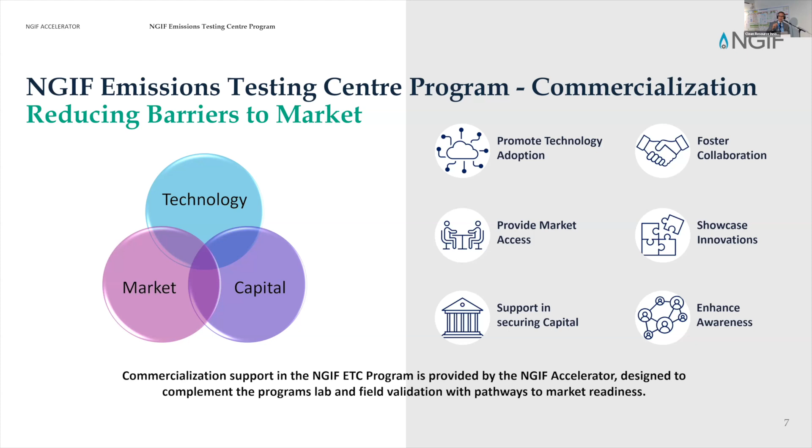We wanted to create this largely because we wanted to drive commercialization forward. Ultimately, what we want is for these innovative technologies, and the companies producing them, to be successful in the market. So our focus is on ensuring that they have everything they need in order to be commercially successful.

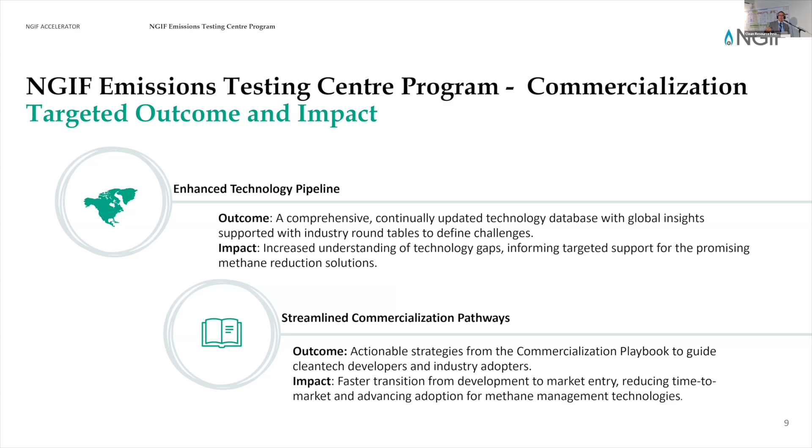There are four dimensions to this. An enhanced technology pipeline—the idea being that we are creating a full ecosystem pipeline of new technology ideas. And streamlined commercialization pathways—how do we help entrepreneurs actually move their projects and companies forward more quickly?

Accelerated market adoption and scale up—by doing the testing on site with a producer, we're allowing the technology to be tested in the field in a way they wouldn't otherwise have access to. And an expanded industry and financial network—we're creating a database and we're engaged with the financial industry.

As I noted a couple of times, we're effectively creating an ecosystem of new technology ideas that can move into the market more quickly, driving forward innovation, thereby driving down methane emissions and continuing to have a successful natural gas industry that's delivering fundamentally what's most important: affordable, reliable, and acceptable energy for Canadians and our customers around the world. With that, I'm going to turn it over to one of our key partners, Ian Gates from the University of Calgary, to talk more about what's actually happening on the ground.

Thank you, Tim. My name is Ian Gates. I'm a professor at the University of Calgary in the Department of Chemical and Petroleum Engineering, also Associate Vice President, Research and Innovation. Today I'll talk about the ETC, the Emissions Testing Centre Lab, and what we're doing there with respect to accelerating technologies and de-risking technologies. Let's go to the next slide.

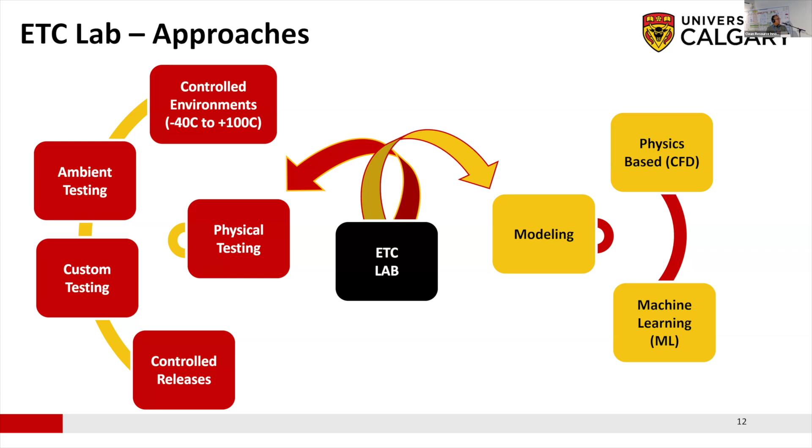The other useful thing about these types of models is the ability to start placing sensors—to put in the minimum number of sensors needed to get a bracketed amount of uncertainty becomes a useful outcome of these types of modeling.

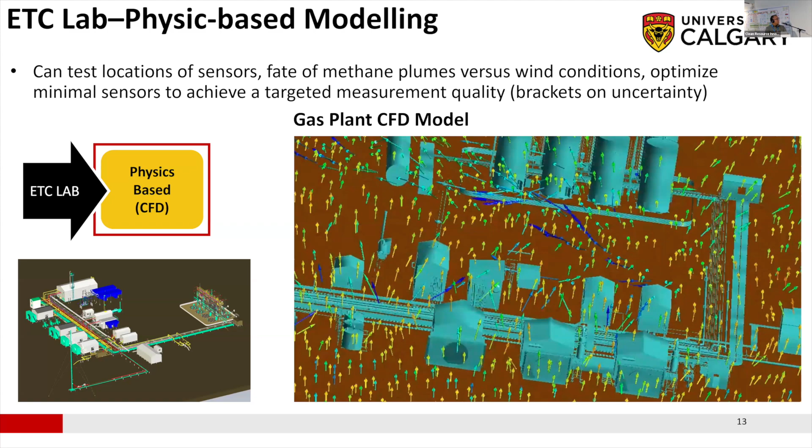So here's a case study on a modeling project that we've done, which is on the flare stack. When you start looking at methane purge rates in flare stacks, of course, we want to minimize that. And the problem is you have air that can go inside the flare stack. So it's really about minimizing, or really avoiding, any oxygen going inside the flare stack.

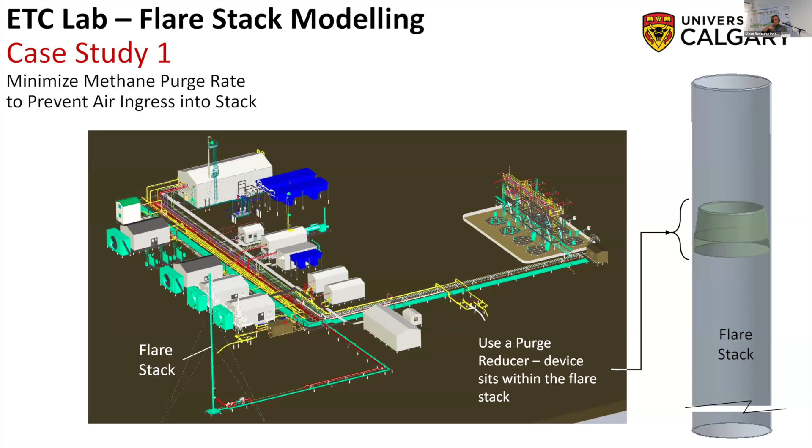So what you see there is the plant, and then on the side the flare stack, and what's inside there is a purge reducer, which you would place inside the flare stack to reduce the purge rate of natural gas, so as to minimize the ingress of oxygen into that flare stack. Let's go to the next slide. And what you see there is we constructed a model of that. So it's a computational fluid dynamics model.

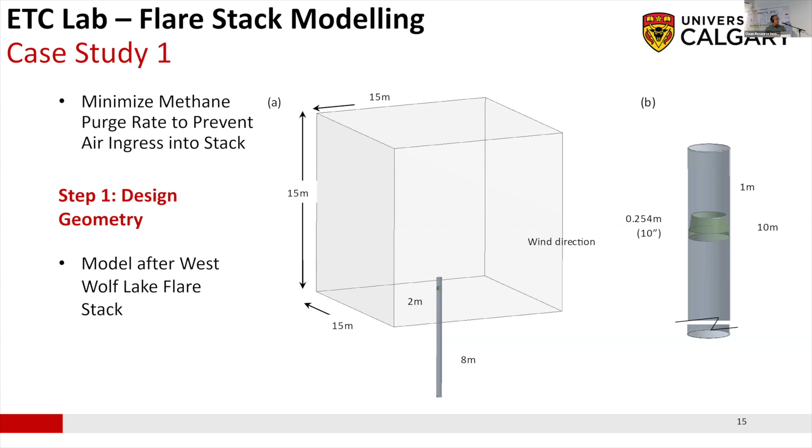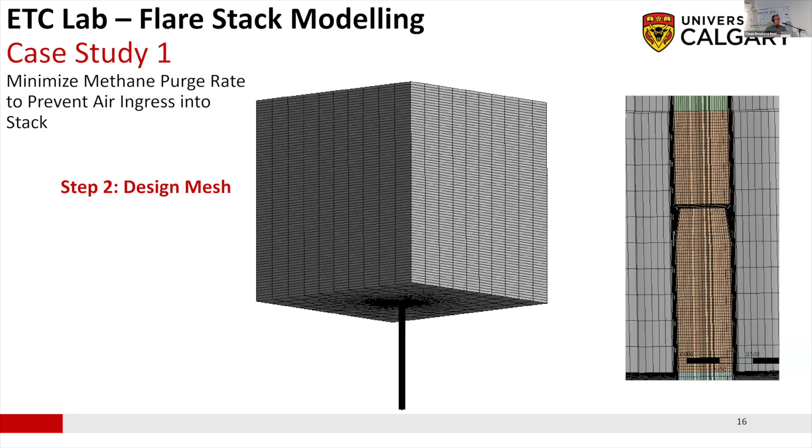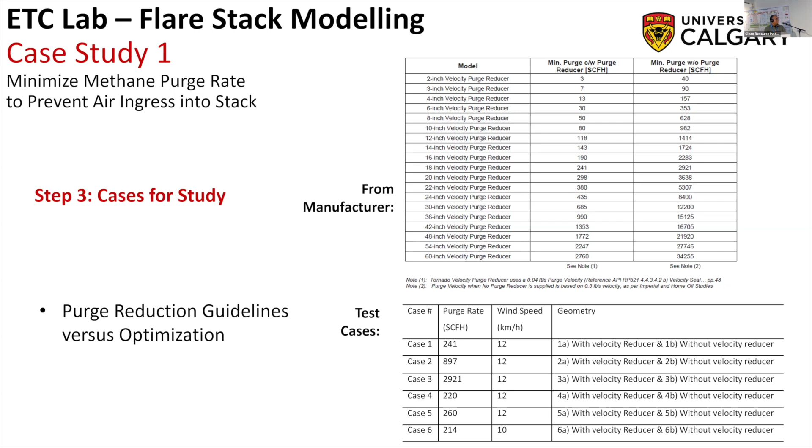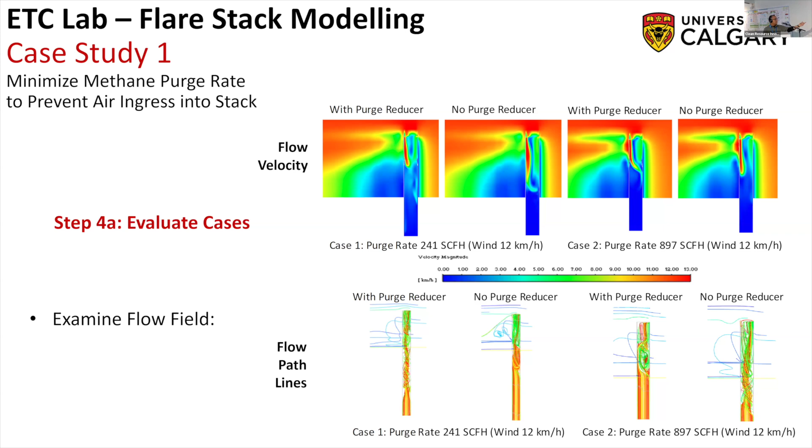Now, what's really useful about this is you can do these kinds of numerical experiments and test things, and they're physics based, so you can understand what's happening within the system without doing a whole load of experiments. It's very tough to do experiments on a flare stack, but we can now understand what's happening inside that flare stack. Could you please go to the next slide?

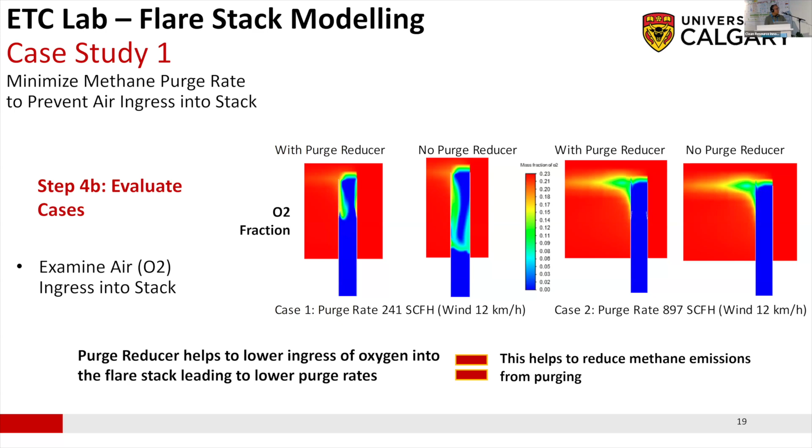So with the CFD tools, you can do the what-ifs, you can test what's happening, you can then start to redesign and examine how we would get around purge rate so that we can really, truly minimize those flow rates.

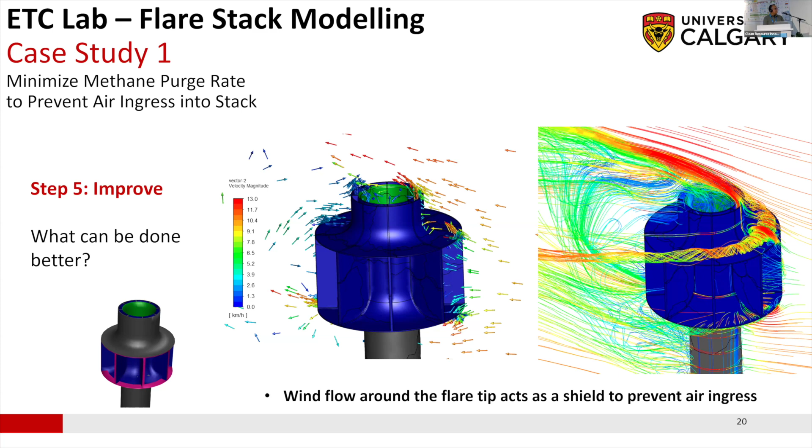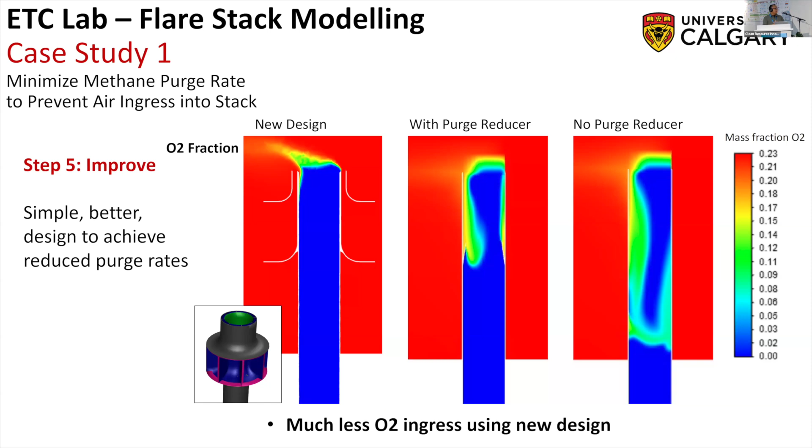Okay, the next slide. If you look on the left side of the screen, you're seeing the new design, where the oxygen fraction shows very little ingress. With the purge reducer, you see some ingress. With no purge reducer, quite a bit of ingress. So a design that's fairly simple, static, has no moving parts, and avoids oxygen ingress into the flare stack. So let's go to the next slide.

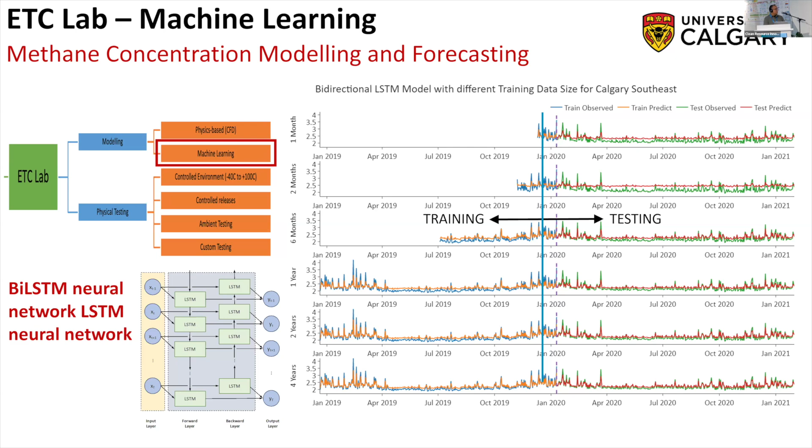And now let's go to the physical side of the lab. This is the side where we experiment, we build, and we adapt our labs to test equipment. In here we have a very user-flexible lab with open space, and let's say a company brings in their device, we can build around that device. We build infrastructure, gas testing equipment, flow rate measurement, all of the things around the equipment that is to be tested.

And we have a whole lot of analytical equipment to support all of this, but it's really a beautiful space where it's very flexible so you can build what is needed to test equipment as we see fit to support these young companies as they go through the ETC. Let's go to the next slide.

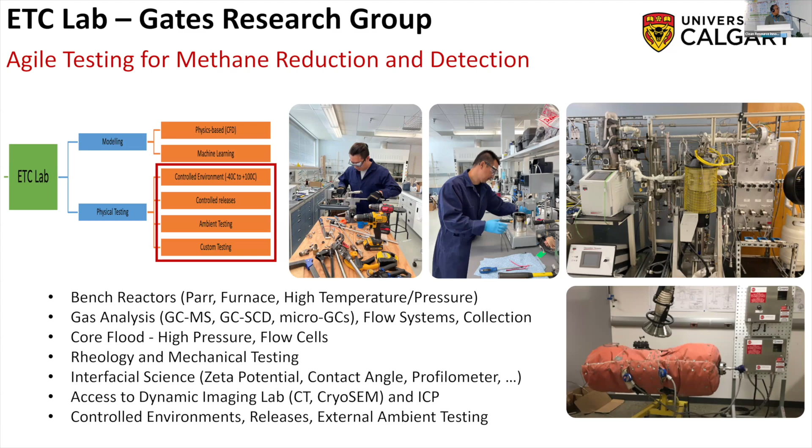And so we have 5 labs in total, and we have enclosed areas. So we have a greenhouse within our lab to test greenhouse gas or methane emissions. We have a garage out back where we can do ambient testing, so we can do seasonal testing and long-term testing outside, and a whole lot of controlled environments from -40 up to about +100, where we can put equipment into it and run it over a long time to understand how does it behave with respect to those temperatures.

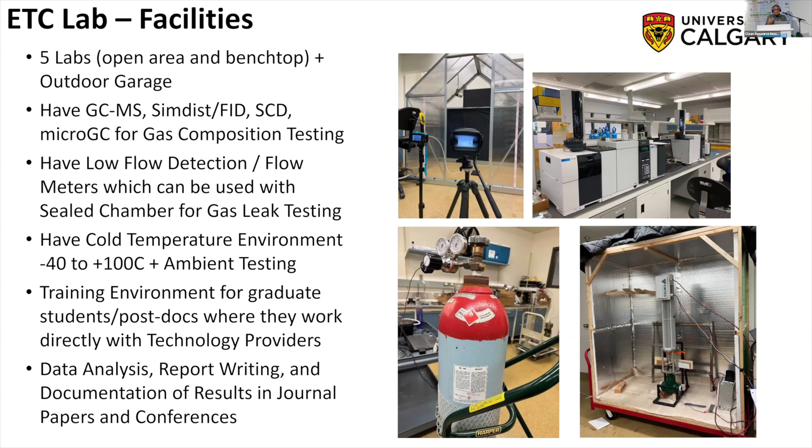Something very safe and easy to do within our lab, so we can then evaluate equipment and then give data and feedback to those vendors, those technology vendors, so that they can understand how to improve their equipment and then move eventually from the lab to the field for further testing. Let's go to the next slide.

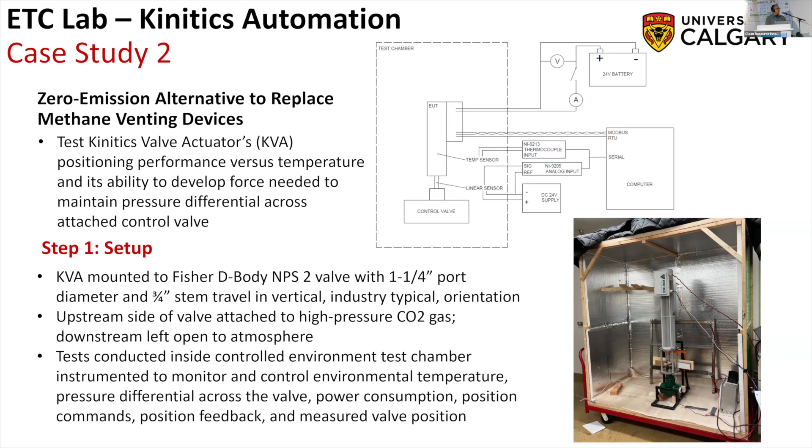This is an example of what we've done in the lab with Kinitics Automation. So this is a company that has used the lab, the ETC lab, and has used the field. And so in this, we're testing an actuator, which is based on a shape memory alloy, and it's an electric actuator versus a pneumatic one. So that is what we were testing in there. And we put it into our cold hot box, so we can go -40. With this one, we went up to +40, and we can test the response of the actuator with respect to temperature. So let's now go to the next slide.

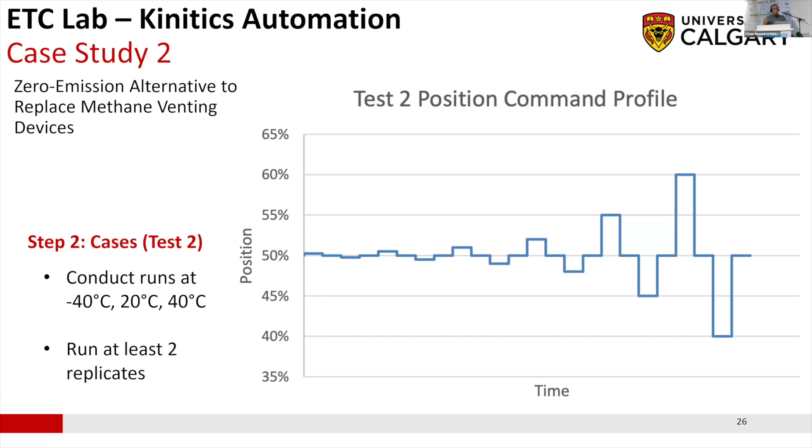And what you see here is we put in a position command profile where we want to control that actuator. We tested it at -40, 20, and 40 degrees. And we at least do 2 replicates to make sure we see consistency in data, and it starts to give us an idea of errors. So what is a bracketing of error within the system? And so let's go to the next slide.

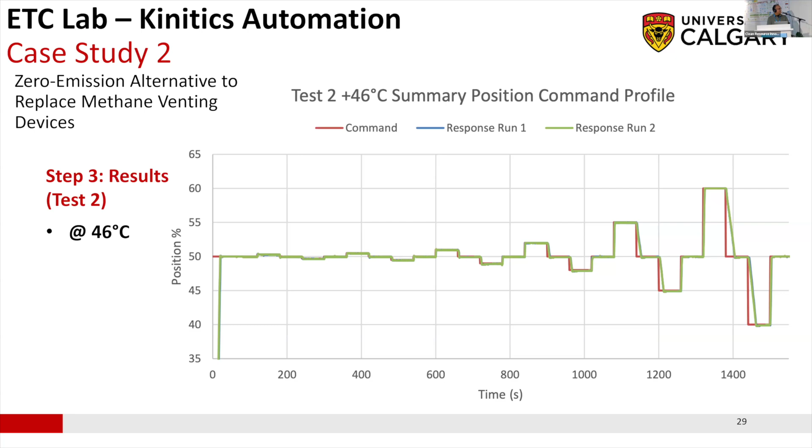So the thing is, what happens in the lab is it's an environment which is very free and open to numerically model things, to see what happens in the virtual world, to use machine learning to improve things. And then the second side is a physical testing environment where we can test equipment in an incredibly flexible way, according to what the tech vendors need. And we can do it fast.

So a typical setup we can get done within about a week. We then do testing for 1 to 2 weeks, whatever is needed, and then we can dismantle, do reporting, all of that within weeks after that. So a very rapid response so that companies can get feedback very quickly for improving their technologies, eventually helping them to get to the field.

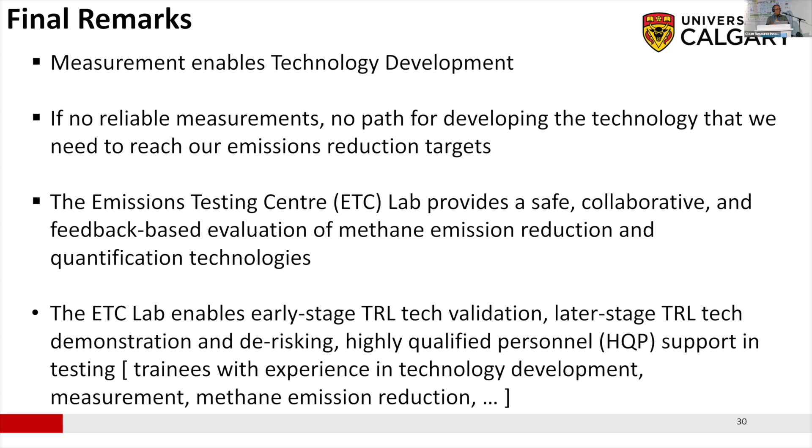So my name is Scott Volk. I'm the Director of Emissions and Innovation at Tourmaline. For people that don't know Tourmaline, Tourmaline is Canada's largest natural gas producer, and we're the host and the operator of the field portion of the NGIF Emissions Testing Center. And we say emissions testing center, but we're quite focused on methane emissions. So whenever you hear emissions testing center, just think methane emissions testing center.

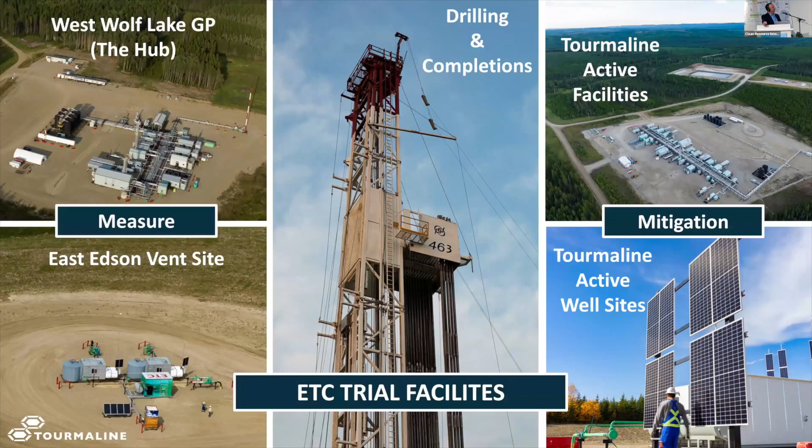So if we kind of take a couple steps back, if I can go forward. Oh, I already introduced Tourmaline. Okay. It's just moving on its own now.

Mind taking me back to just the next slide.

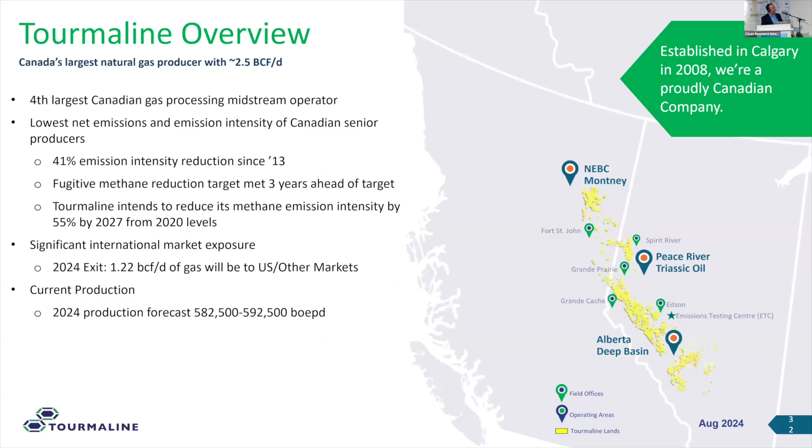Perfect, right there. So if we go back to what the Methane Emissions Testing Center is all about, it's about working with a clean tech company that's working on reducing methane emissions or detecting and quantifying methane emissions. And in order to get into that, I want to talk about what the different sources of methane emissions are and what all the different clean tech companies are actually working on.

So everyone thinks, I think I actually heard a quote on the main stage, that all methane emissions is just tightening the pipes. It's a little bit more complicated than tightening the pipes, and there's a lot of different clean tech companies that are working on all sorts of different solutions to address all these different types of methane emissions. And they're there for a variety of different reasons, whether that be for safety.

So in this case, if you have tanks or high pressure vessels, you need the ability for them to release pressure, or else you could have a risk of the tanks over pressuring. So those are a safety kind of reason. There's things like surface casing vent flows that a lot of clean tech companies are working on solutions for. Methane solubility is kind of understated.

So just like any solution, air or liquid or combination, you get the situation where you would have methane being soluble into liquid. That could be soluble into water, into oil, or any type of solubility. So when you change pressure or temperature, the amount of methane that was in that liquid comes out of that liquid, and if it's not in the right place, that can be a problematic thing.

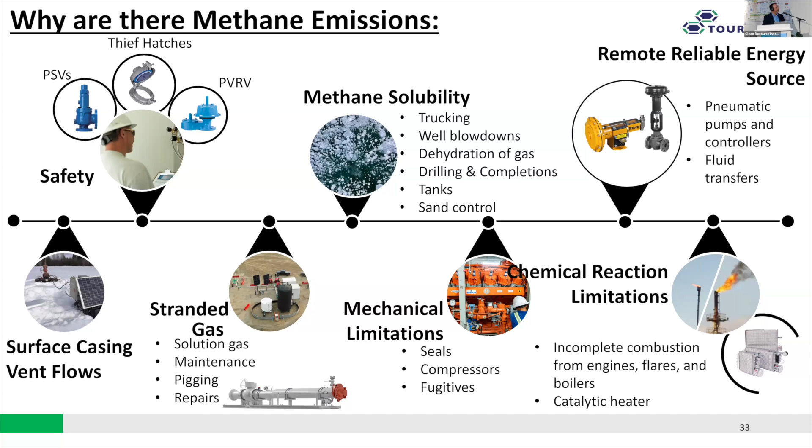So that focuses on where the methane challenge is. Now there's this concept of quantification and measurement, and what technologies we're seeing coming through the emissions testing center in the space. Quantification can be done through a number of different ways. You hear this concept of source-based quantification, or site-based quantification, or top-down, bottom-up, and we can talk about the different technologies in the different space.

Usually any beginning path into understanding methane regulations uses an inventory and an engineered calculation to derive the amount of methane that could be coming from vented devices. That's a starting point. Now you start getting into where some technologies are starting to come in. So you start to see handheld devices. Those could be OGI cameras. They could be high velocity samplers.

There's a number of different technologies we work with that are enhancing different types of handheld devices and how they can improve emissions quantification, measurement and detection. You'll see fixed wing aircraft detection. We've worked with a number of fixed wing aircraft companies. Bridger and LSI, for example, have come to the emissions testing center to validate and confirm their technologies.

Drones, we see a number of drones. They've come to site in order to work on different ways. It's very similar to aircraft-based sensors, but usually quite localized and more pinpointed than some of the broader detection methods.

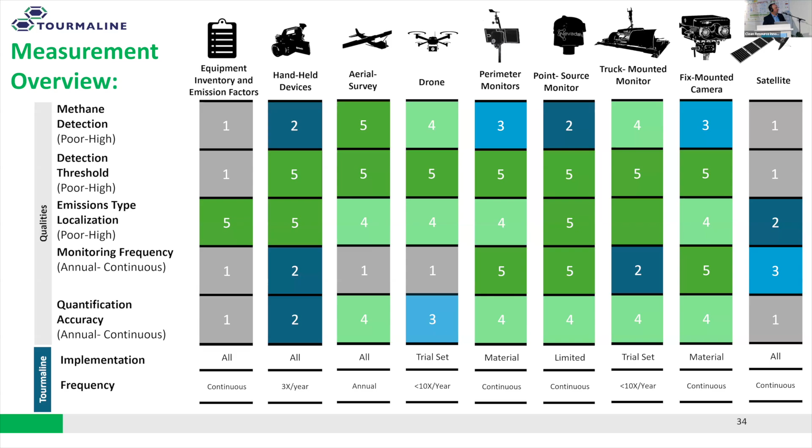Now we'll talk about what the facilities are, and for the most part I'm just going to show you a picture show of hopefully cool technology that's tested at the emissions testing center and how it works. I'll walk through the categories of sites we'll talk about, and then what we do at each individual site.

West Wolf is the hub. As Tim mentioned, it's operated by Tourmaline and jointly owned by Tourmaline and Perpetual. So that is the hub of the emissions testing center, with a lot of work there in real life applications. When clean tech companies come and ask for validation, what they want and what the testing center can deliver is a real life validation that they can take to other companies to sell their product, or to regulators to prove their product works, or to a number of different sources.

And we cater to what the clean tech company is looking for. If they're looking to validate a couple of claims to put on a brochure, that's fine by us, we'll work with them on that. If they're looking for a full-blown white paper to show a regulator that they have the same probability of detection as a competing technology, we will go that far. That's definitely where the U of C and Tourmaline will collaborate on having both an academic and a real life operation to do that type of work.

Everything in between, and I guess there is one other type of testing: early testing of prototypes. We do that at our site as well. It's nice to have the lab where Ian can work on things that are pre-CSA approved type testing, and then we can also just validate prototypes at site. Often they either fail and they just want to work on the device, or we do early testing and that's just an iteration in a prototype, and those reports typically aren't as public.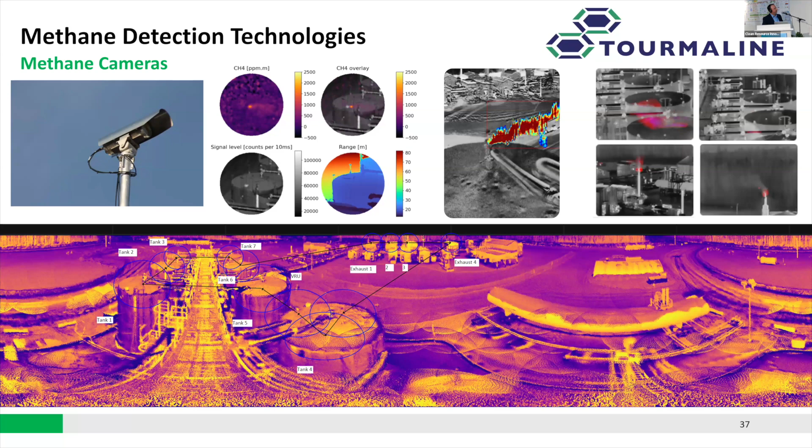Another technology using a similar camera type would be Kuva. It operates a little differently — that's the black and white picture up in the top right. Again, it's panning across the site looking for methane emissions and showing them, and we're helping them validate and confirm that they can actually do these tests, and that when they're quantifying, the quantifications are correct.

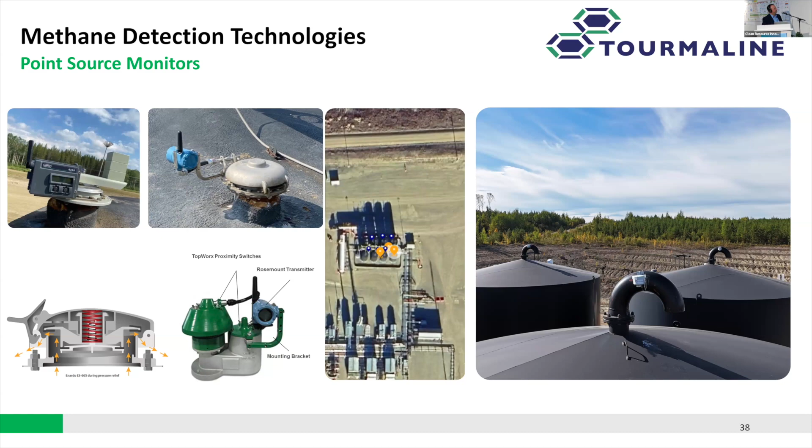Now we're talking a bit more about truck mounted sensors. There's an interesting thing about them — they're mounted right on a typical half-ton truck. But because you can actually go around the plume or around the site, you can detect different wind directions, and quantify and detect methane in a different way than you could otherwise, because you're physically moving around what could be a plume of methane.

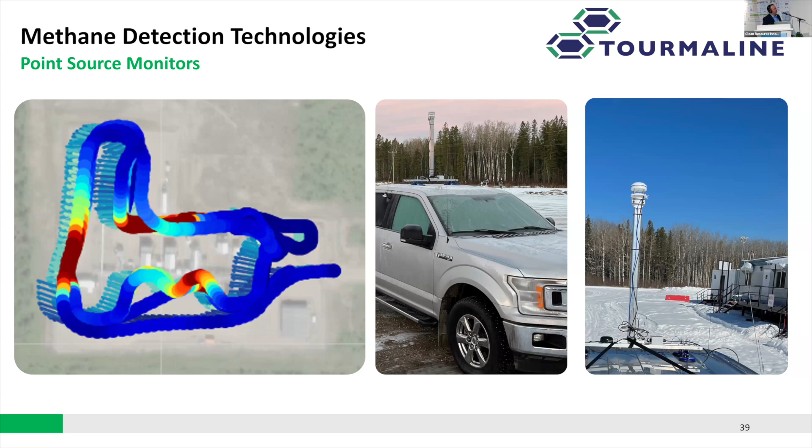At the vent site, this is where we really focus on quantification. Companies come with a sensor — maybe a point source or wind sensor, any version — and they don't just want to know whether they can detect, but whether they can detect the actual amount of quantity. This is where we do controlled releases of different quantities of gas at different rates, and verify whether they can find gas at those rates.

We have this site set up so that we can vent from 4 different places at once. We can do it blind to the clean tech vendor, or tell them where the vents are likely to come from. We can release from one single point or 4 points all at once, and work on quantification.

This is some of the funner parts because things are flying around. We've worked with a number of different technologies on aerial detection, some of them via satellite.

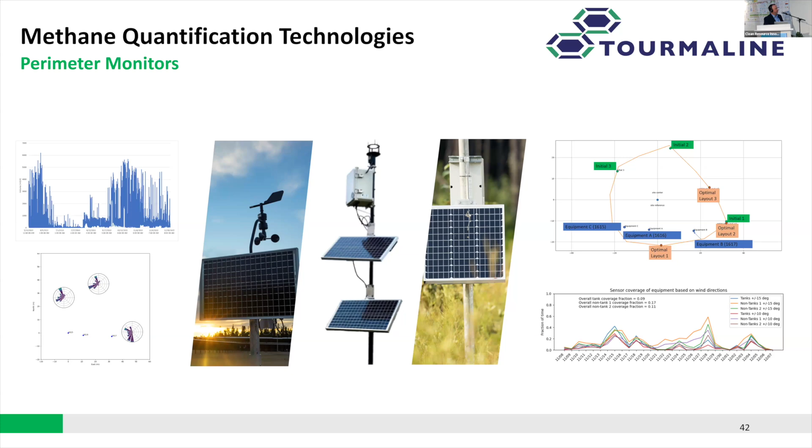The methane emissions testing center is significantly more than just the one hub. It involves every facility that Tourmaline owns. Here's some things we've done at other facilities, and I'll walk through some pictures on the next slide.

There are valves in that system, and a number of different technologies looking at ways to improve compressor packing and valve systems. We're able to bring them to the site, test and validate whether it's working and whether it's really reducing emissions.

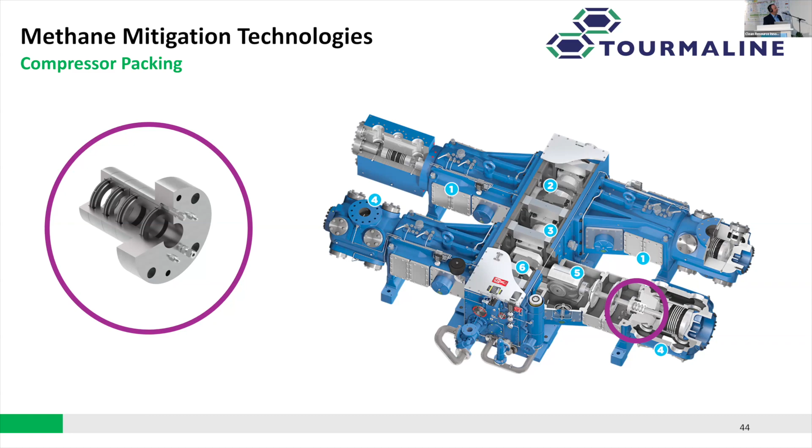Then they can use that information to decide whether to sell to market or not. One of the probably most unique and forward-thinking parts of the emissions testing center is our mobile lab. The mobile lab is concentrated on exhaust systems, whether from engines, boilers, or anything consuming natural gas.

We have a mobile lab where we go around and test different types of engines to see whether there's slip from the engine, but more importantly we're testing technology adaptations that improve the chemical reactions on the engines and testing whether they're working.

You'll see a lot of Series 5 upgrades at Tourmaline, which we've validated at the testing site as a drastic improvement on methane emissions, working with all the different engine vendors to improve slip from engines. Next slide.

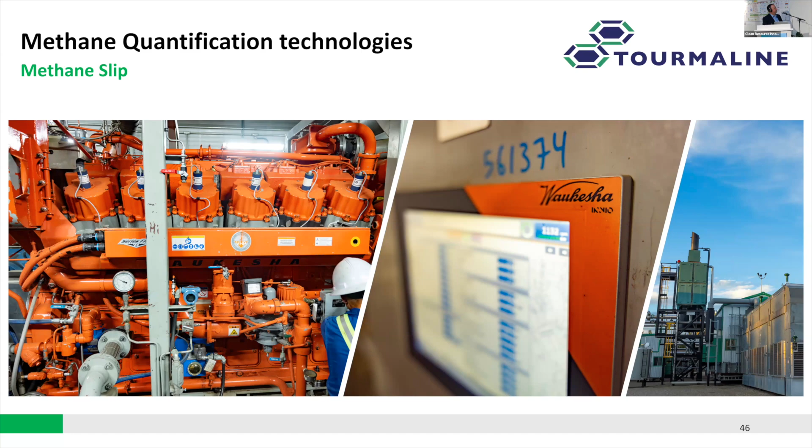Well sites are probably one of the earliest things we looked at as far as methane emissions, and one of the bigger places where we see technology innovation.

I mentioned pneumatic controls as being a source of methane. This is one of the places where we do a lot of work on controls and a lot of work on site detection. Next slide.

Here's a couple of different technologies that we've tested. Ian talked about Kinitics being the shape memory alloy electric actuator.

That's one of the technologies that graduated from starting out in the lab, being validated in the lab, moving to the emissions testing center out in the field, getting a real life validation, and then having the data to go and have a commercial product that they can sell to the market. So a really good focus on how we can get technology companies to market. That's a BC company that's solving solutions for the industry right now, being British Columbia, Canada.

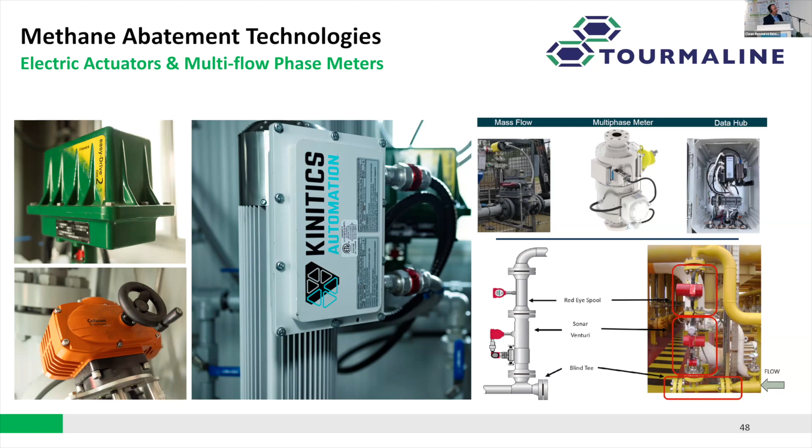We also do lots of work with other electric actuators and lots of other alternatives to actuators, like multi-phase flow.

One alternative to methane pneumatics is to still keep the pneumatic instrumentation in place, but to replace the methane with air. So we've been validating and working with a lot of companies working on that type of solution, essentially compressed air as an alternative to methane in the pneumatics themselves. They leave all the equipment on site, but create compressed air. Here's a number of companies working in that space that have also come to the emissions testing center.

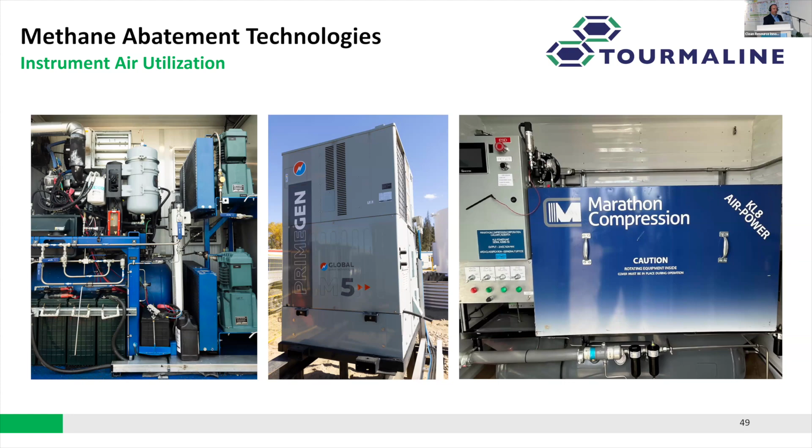The other thing that is useful for when you have stranded gas and no way to get that gas to a marketplace is the alternative to combust it. Obviously, when you combust it, you want to do that very efficiently. We've been working with a number of different companies focused on ways to do that more efficiently.

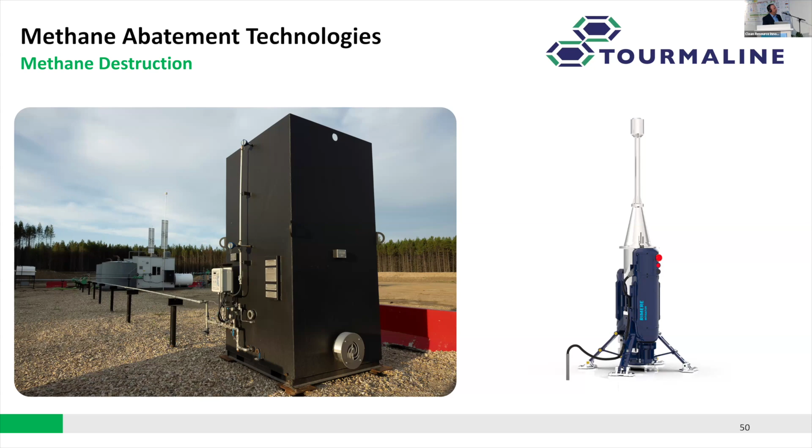I'm hoping I'm coming to the end here. This is getting long. One of the last places we look at methane emissions and how to reduce them would be on drilling and completion. I'll jump right into the next slide and we can talk a little bit more on how that works.

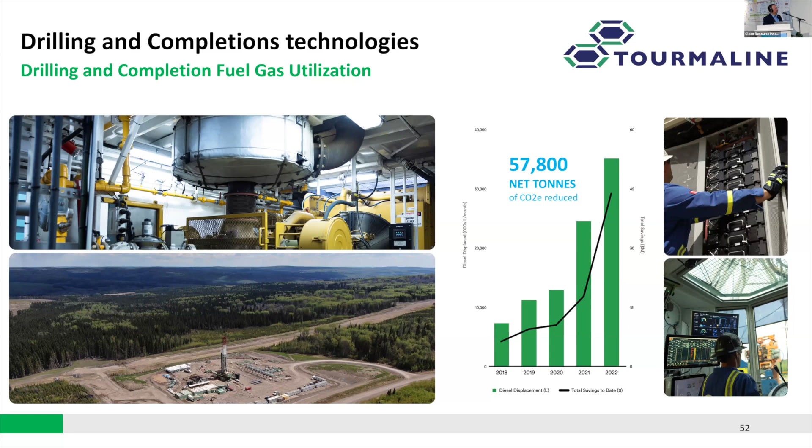As we're displacing diesel fuel on drilling rigs and looking at ways to run our drilling rigs or completions on natural gas, we also have to look at ways to make sure that gas is being consumed completely and that there aren't any methane emissions from it. This is a good place where the methane slip trailer can be really helpful, working with technology companies focused on reducing emissions in the drilling and completion space.

Okay, that's everything. I think we'll go to the panel and have a bit of a conversation.

Thanks each of you for your overviews of your piece of that work and that project. Going through the emissions testing, I don't think those presentations really do justice to how cool those facilities are, and you can really see those technologies in place. Going through a facility at any time is always interesting, but at West Wolf Lake you can see where there's more instrumentation and sensors throughout the facility, so that data can be captured on site and transferred back so offsite data users can use it too. And I love going through Ian's lab and seeing what they've cobbled together to test, and all the things they get to play with. It actually looks like a ton of fun.

Okay, we'll jump into some questions here, the few minutes we have left. Tim, we'll start with you. Actually, Scott, I think this might be something you can fill in some of the backstory on. We talked a little bit about the ETC and why it was put together, but is there more on the events that kicked this off? What's the backstory for it and how did it really come to be?

Well, I think the principal backstory is that the natural gas industry is very keen on driving forward innovation, particularly innovation in improving environmental performance. We recognized that for decades and decades we've talked about all the innovation in the electricity industry, and a ton of public money has been put into it. The natural gas industry really hasn't had a light shone on it, and the innovation underway in that industry. We thought, what if we were to create mechanisms to give profile to the gas industry and some of the creativity that's underway? What more creativity could we trigger? What more innovation could we trigger?